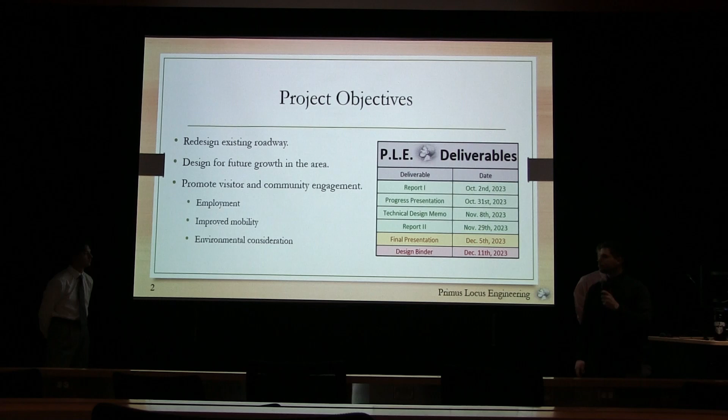So for choosing the final alternative, each engineer will design or construct a weighted rubric. This rubric will have specific criteria relative to their discipline, and these criteria will then have weights based on their importance. Using this rubric, the engineers will rate all of their alternatives, showing the comparisons within them. Once they are rated, the engineers will be able to pick the optimal alternative for the final design.

After all the alternatives are chosen, we were able to construct a design and construction cost estimate. This will be talked about later in the presentation.

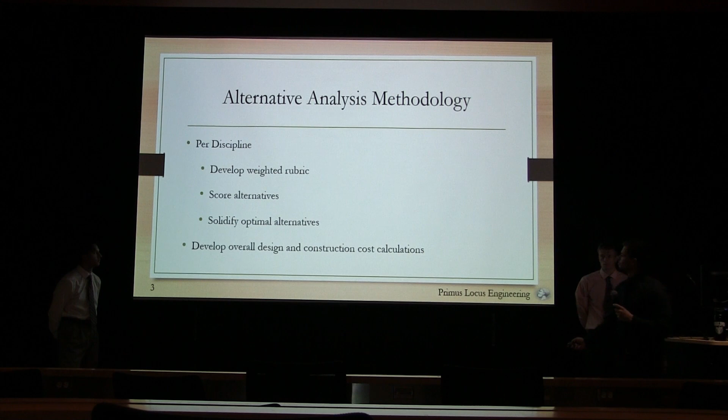As well as being the project manager, I am the water resources engineer. Recapping some of the things from the previous presentation, my main goal of the project is to treat the water quality volume from the impervious areas to improve water quality while also reducing the phosphorus load by at least 65%. I will also be designing systems to store the flood control volume within the project.

All of these designs will be done in accordance with local, state, and federal regulations. In the previous presentation, I also ran through the steps and calculations to calculate the water quality and flood control volume. For the sake of time, I will not recap those, but they are attached in the technical memo.

I also presented 3 alternatives in the previous presentation. I did add a 4th for the analysis and picking the final alternative.

Recapping the major components, alternative 1 had the bioswales on the north and south end of the road. The visitor center had the storm sewer system leading to the infiltration basin. On the east side, it was the curb and gutter system, and alternative 1 had the hydrodynamic separator leading to rain gardens.

Alternative 2 was the same bioswales on the north and south end of the road. However, this time at the visitor center, instead of the storm sewer system, it was the rain garden leading to a detention basin. On the east end of the road, it was catch basins again and a curb and gutter system, but without the hydrodynamic separator—it was now rain gardens leading to underground infiltration storage.

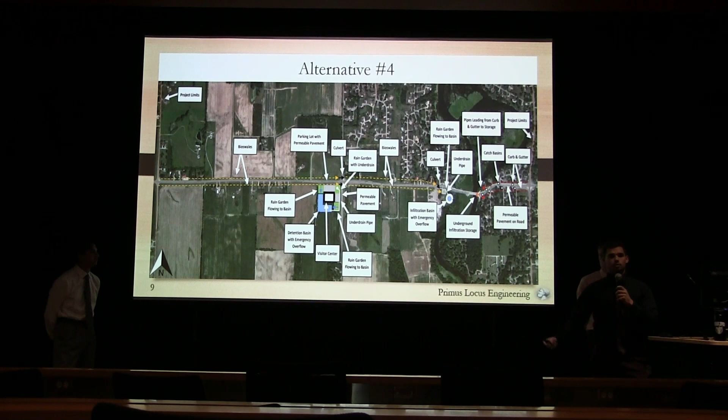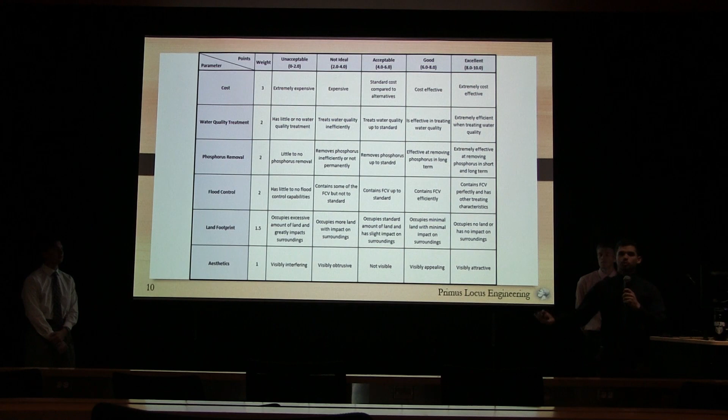Last was aesthetics with a weight of 1. This wasn't incredibly important to me because most of my systems can't change too much with the aesthetics. However, for systems being put in around the visitor center, I wanted to make sure it was visually appealing since it will be a brand new center.

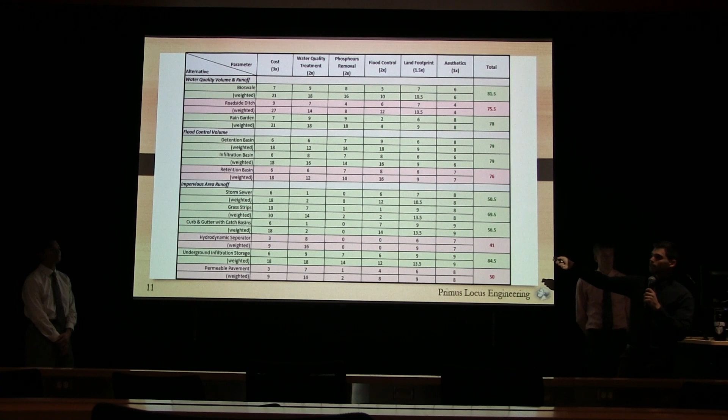So a sample plot to help understand this table, starting with bioswale at the top: I would rank each criteria on a scale of 1 to 10, and then based on the multiplication of the weight, I rated this a 7, which then went to 21. Adding the columns of each criteria, we would get a total. For the bioswales, it was a total of 81.5 versus, let's say, the roadside ditch was 75.5. Therefore, I went with the bioswales.

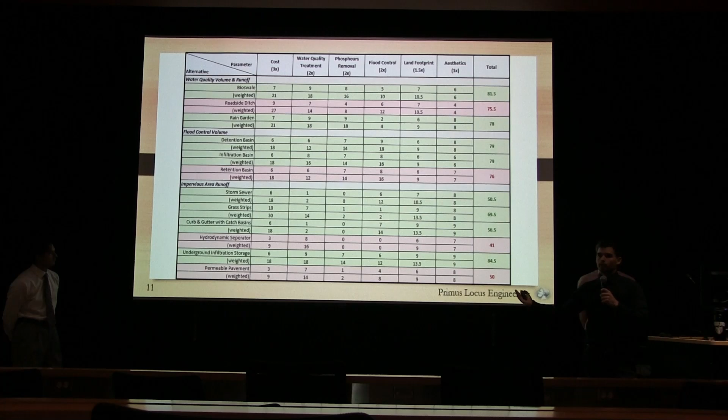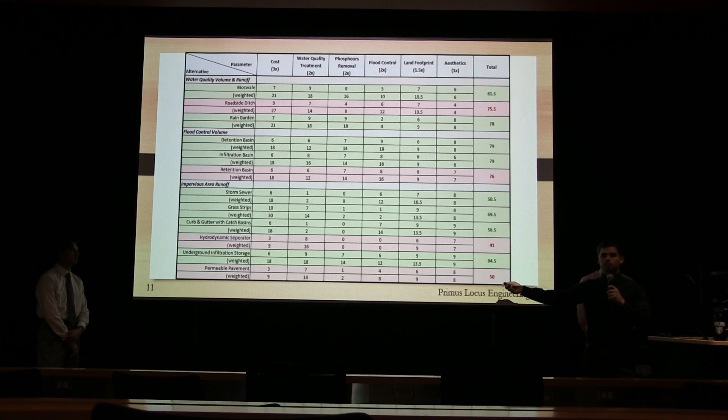And then I separated each system within its own jurisdiction. The water quality volume systems were separated, and the flood control volume systems were separated. And here are the impervious area systems, where the systems are used either at the visitor center or on the east side of the bridge.

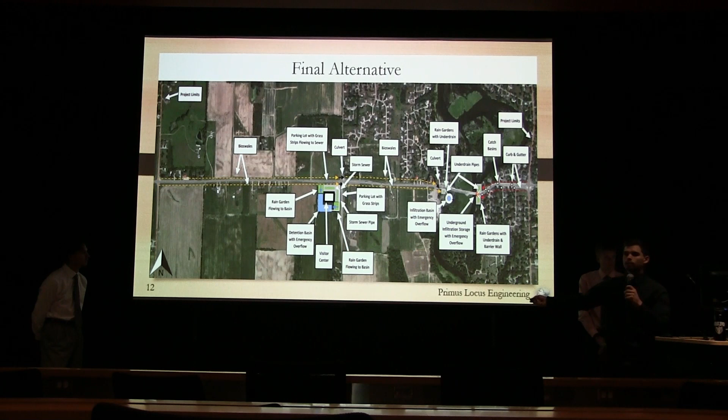At the visitor center, I did go with the storm sewer system. There will be grass strips in the parking lot to allow pre-treatment for the water collecting there, going to the detention basin. I also followed alternative 2 and put the rain gardens on both ends of the parking lot to allow extra treatment for water running off into the basin.

On the east side of the road, I went with the curb and gutter system leading to the rain gardens. These rain gardens will be supported through barrier walls to ensure they remain structurally intact in the case of strong flow, and then these will filter down into an underground infiltration storage.

So with my final alternative, in the future I plan to minimize costs within each system while also improving the efficiency, coordinating with each member of the team to do so.

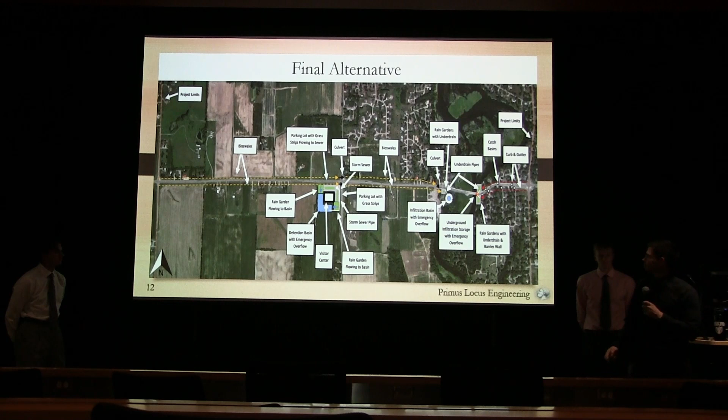So the project objectives for the environmental engineering component of the County Road 38 reconstruction include designing complete clean water treatment that requires meeting the most stringent EPA drinking water standards by using the latest treatment technologies. Additionally, the project demand was forecasted for the next 25 years, which requires 1 million gallons per day of clean water to be supplied.

The location of the surface water and groundwater was coordinated with the other team members, and the existing water network was eliminated due to concerns in its ability to supply the 1 million gallons per day.

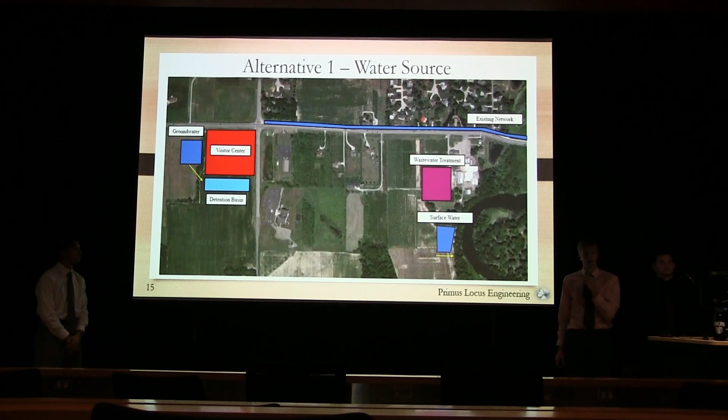The second alternative revolved around the treatment components. The first type would be the flocculation basin. There can be a vertical turbine mixer, a paddle flocculator, or a baffled channel. The vertical turbine mixer is a confined unit, while the paddle flocculator is slightly bigger with better water quality. The baffle channel was eliminated due to it being a more old technology that does not meet the criteria of recent technology.

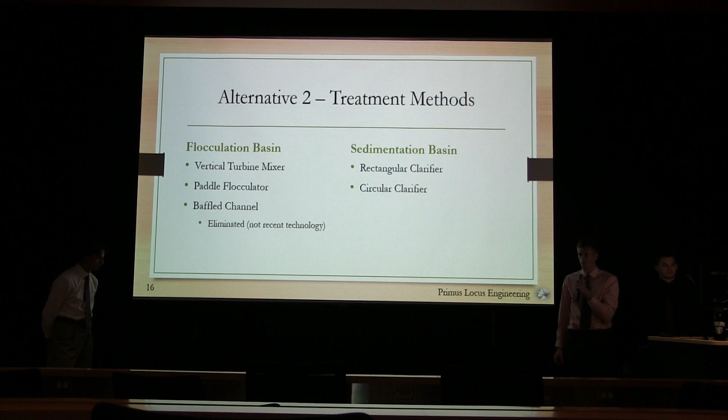And the type of sedimentation basins considered were a rectangular clarifier and a circular clarifier, once again having differences in size and water quality. The third alternative was the water distribution.

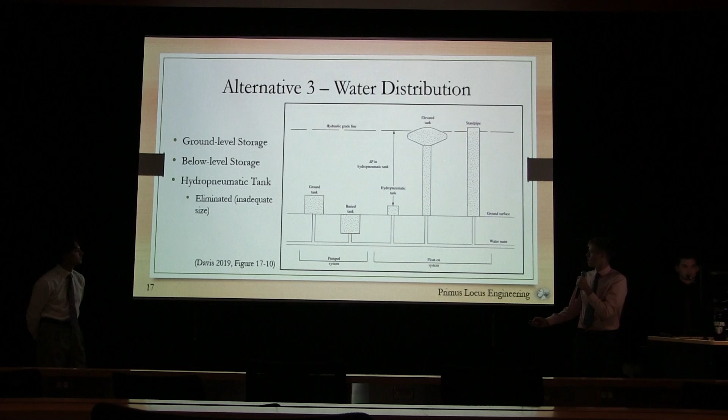The alternative criteria were evaluated using the parameters of water quality, cost, operation and maintenance, land footprint, and aesthetics. Water quality and cost were of the utmost importance, thus being factored with a multiplier of 3, because water quality is imperative to the health and safety of the citizens of Goshen, while cost is also extremely important in providing a cost-effective design for the city.

Operation and maintenance was also weighted with a factor of 2, because the standard level of labor is a characteristic that will last the life of the water treatment plant. Land footprint measured the amount of land consumed by each alternative, and aesthetics measured the visible obstruction from each alternative.

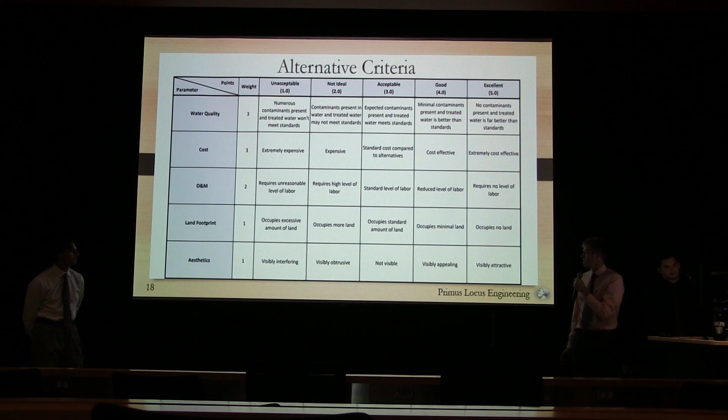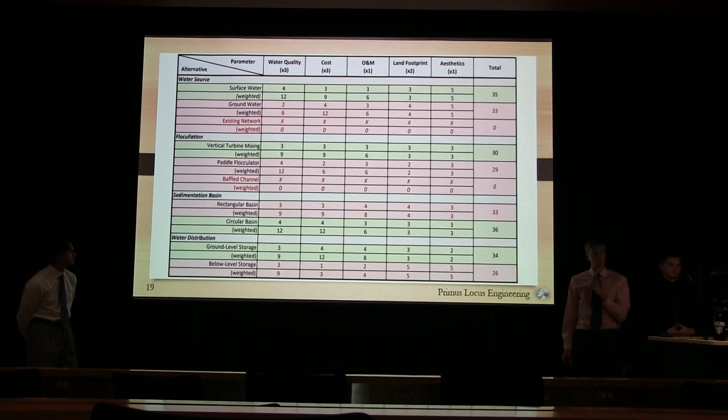Using the same alternative scoring system that Sam described, surface water was selected due to its superior water quality. Vertical turbine mixing was selected due to its reduced cost and confined space. The sedimentation basin selected was a circular clarifier due to its superior water quality attributes. Finally, ground level storage was selected due to its far reduced cost compared to below-level storage.

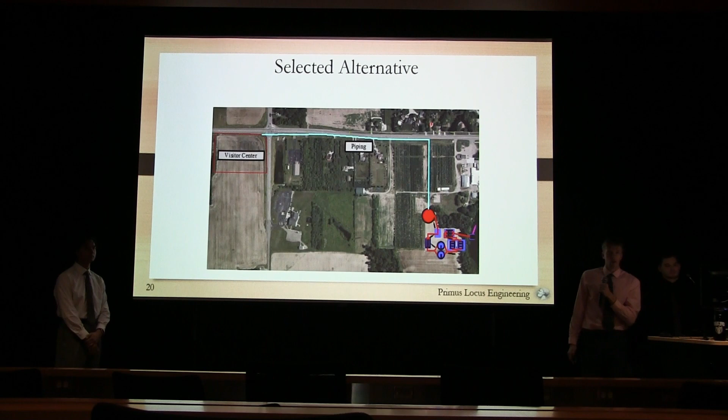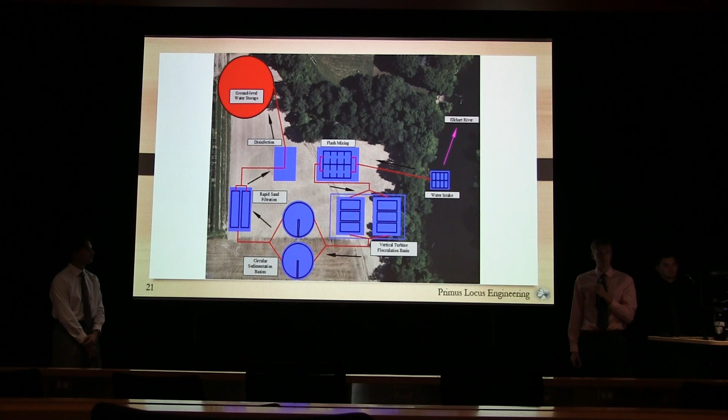Thank you, Sim. My name is Mateo Duran, and I'm the lead of the structural department for PLE, and I'll be talking to you about the visitor center that PLE was tasked with designing for the County Road 38 corridor project. To go over the objectives as we did in the last presentation...

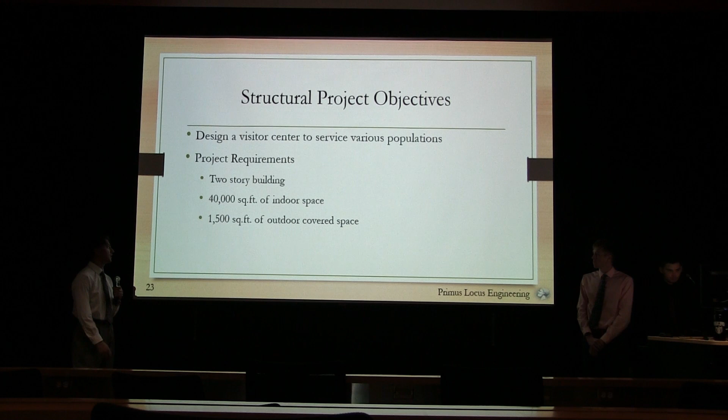PLE was tasked with designing a visitor center to service various populations, such as motorists or drivers going through County Road 38 and Goshen, and even the general population of Goshen or around the visitor center looking for somewhere to visit. The project requirements were a 2-story building with 40,000 square feet of indoor space and 1,500 square feet of covered outdoor space.

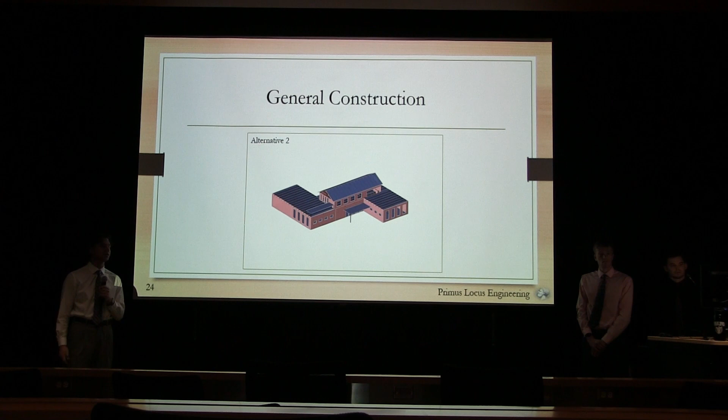With that, we created this, the general construction for all of the alternatives we'll be showing later on. Shown right now is alternative 2, where we have masonry walls, steel beams, and timber roof joists for the upstairs level. All of our buildings will follow this layout, just having different materials for each alternative. So this is the general layout.

We have 41,800 square feet altogether, with 32,000 square feet on the first floor, where you walk into a lobby, then have a gift shop, a museum, and also an area for Elkhart County to have their maintenance run out of.

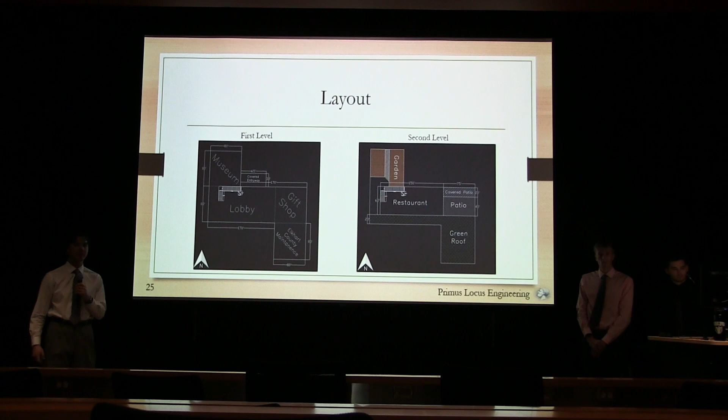On the second floor, we have another 9,000 square feet of covered space for a restaurant, which leads out to a patio, where we also have a green roof and a garden and more covered space. All in all, we will have 3,450 square feet of covered outdoor space.

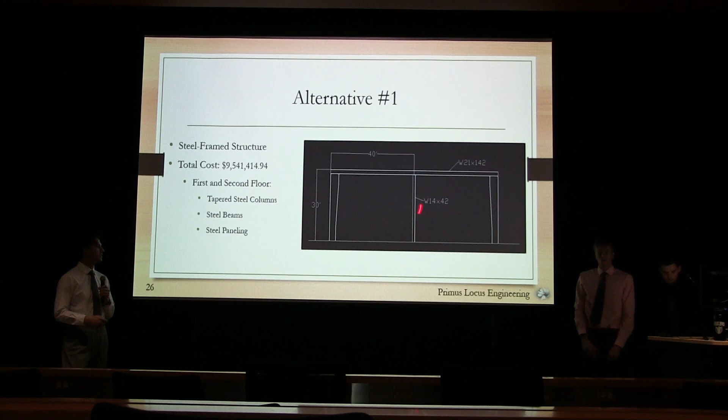Alternative one included a fully steel frame structure, and this alternative came out to be around $9.5 million. This would be steel framed on both the first and second floor with tapered steel columns on both sides, steel beams going across the top supported by interior columns, and steel paneling insulated to allow for energy savings when it came to heating and cooling during the winter and summer, respectively.

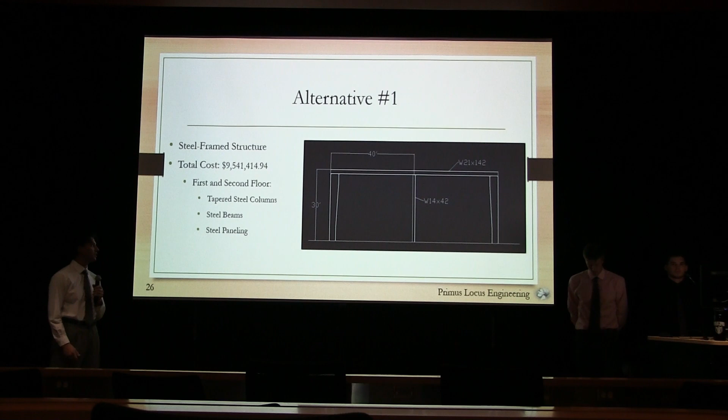Alternative two, shown in the first photo, would include masonry walls all the way around with steel beams and steel columns in the middle, as well as a timber roof joist for the second floor restaurant. This came at a total cost of about $9.4 million. On the first floor, we would have those masonry walls, steel beams going across with the unbraced length carried by interior steel columns.

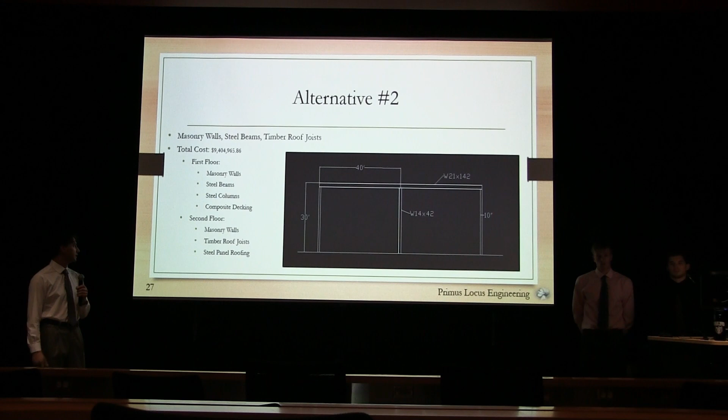And then we would have composite decking running along those beams in order to create a nice base for our second floor, which will then be carried by masonry walls and also have timber roof joists upstairs in the restaurant for that aesthetics for people that are dining there. And those would be covered by steel panel roofing, which again would be insulated to help with energy savings.

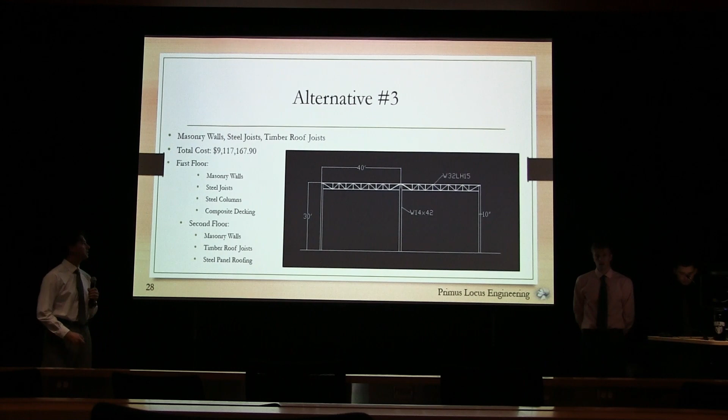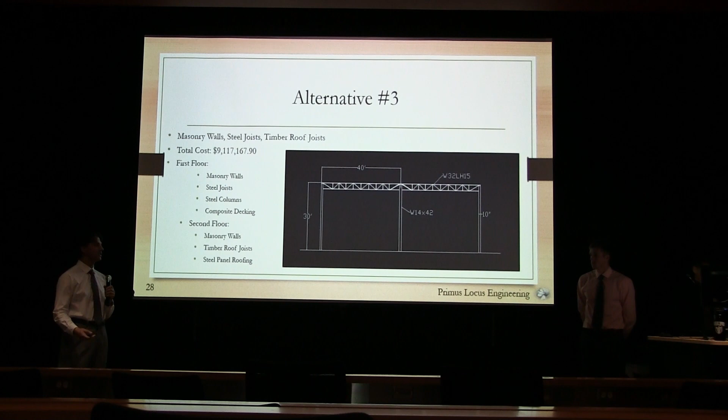Alternative three is very similar to alternative two, with the difference of having steel joists instead of steel beams running along the top of the first floor. This came at a total cost of $9.1 million. Once again, masonry walls all around, steel columns to support unbraced lengths, steel joists instead of the steel beams and composite decking on top. And the second floor would have the same masonry walls with the timber roof joist for aesthetic and steel panel roofing.

With these alternatives, I created a ranking criteria with cost and factor of safety being the top parameters needed to be met. As engineers, we are supposed to ensure the safety of the public, as well as make sure we have a cost-efficient design at hand. I also had environmental impacts, workability, and aesthetics, with environmental impact and workability being a factor of 2 and aesthetics a factor of 1. I ranked these from 0 to 10, with 0 being unacceptable, to 10 being the most excellent.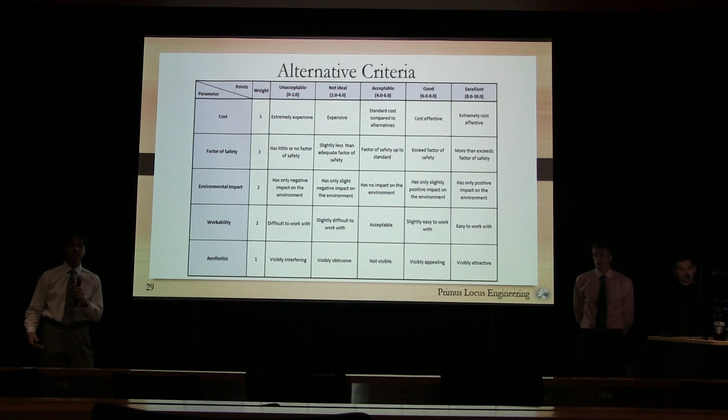With this, you can see how I was able to come to a conclusion on what materials to choose. For the floor, we ranked the steel beams with the steel joist, with steel joist winning out just barely when it came to workability as well as aesthetics. For the restaurant roof, we had the option of timber trusses or steel trusses, and once again timber trusses come out ahead, especially when it came to workability and aesthetics, especially if you're there eating - sometimes you like to have something nice to look at.

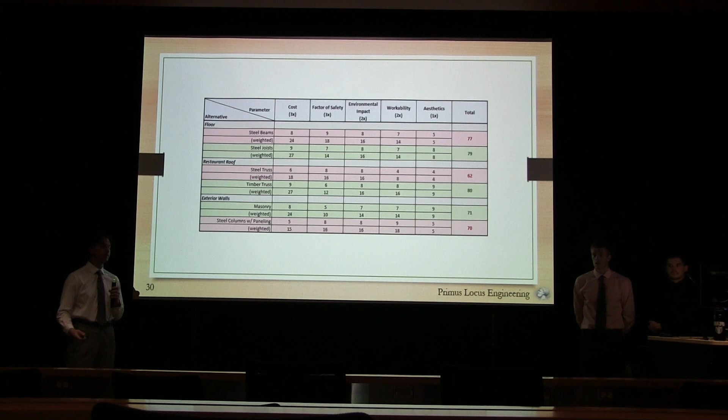And for the exterior walls, we had masonry and the steel columns with the paneling all around, where the masonry came out especially for the aesthetics and for the cost, because the masonry is more readily available around here than the steel columns would be.

With that, I selected alternative 3, which was the masonry walls with the steel joist and the timber roof truss for the second floor restaurant. First and foremost, this provided an easier construction. The masonry walls don't have to come all in perfect pieces like the steel columns would have to, as well as the steel joists. They can be broken apart and fixed if there are any issues with them, and the erection is a little bit easier when it came to the steel joist.

It is cost effective as well, with the masonry being a little bit cheaper than the steel columns, steel joist being a little bit cheaper than the steel beams, and the timber roof being cheaper than the steel roof. And it would be aesthetically pleasing, which would allow for an inviting place for people to want to go into, rather than somewhere that might be a little bit uglier and might deter people from coming and visiting.

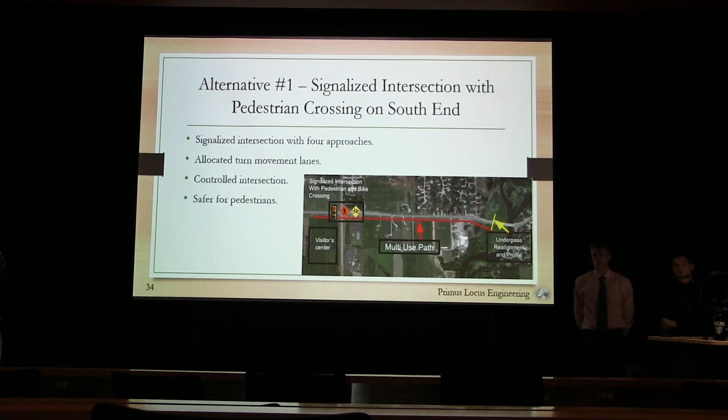The first alternative I have is a signalized intersection with crossing on the south end of the site. This is a signalized intersection with 4 approaches, with allocated turn movement lanes. This is the most controlled intersection and is also safer for pedestrians and bikers, which is an important aspect of this project. This is the alignment on the west side of the project, and as you can see, we have the 2 lanes for the left turn and through, and also the entering and exiting out the visitor center.

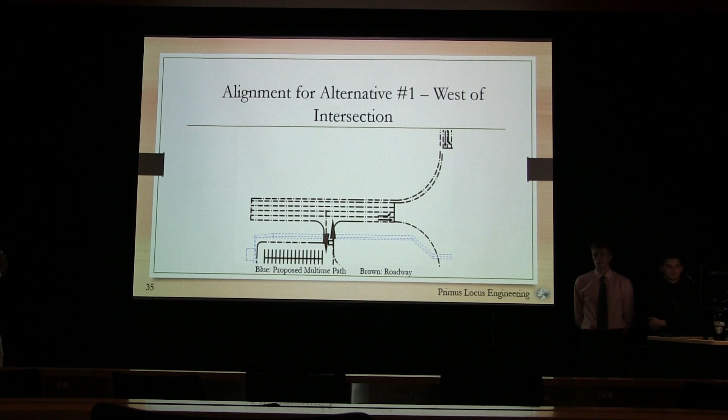And this is the alternative at the underpass for the County Road 38, because there's already currently existing pedestrian means of transport on the north end of the bridge. This is basically just showing that we're going to connect the new multi-use path with the underpass currently existing at the bridge, or with the pedestrian modes of transport existing on the other side near the bridge.

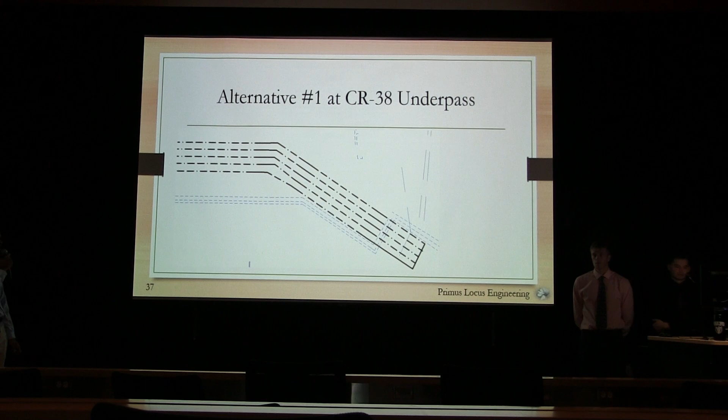This is the second alternative, a roundabout intersection with crossing on the south end. It's quite similar to the other alternative, but it is a roundabout with 4 different approaches: north and south on County Road 21, and east and west on County Road 38. This would have the path on the south side, as mentioned before.

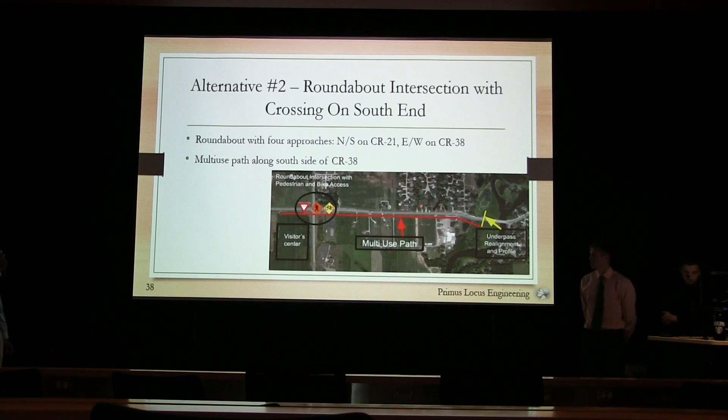And this is the alignment. As you can see, it's pretty much the same as the previous one, except we have the center circle in the middle. We have a through lane, a left turn lane, and a right turn lane. This is also pretty much the same as the other alternative with the underpass.

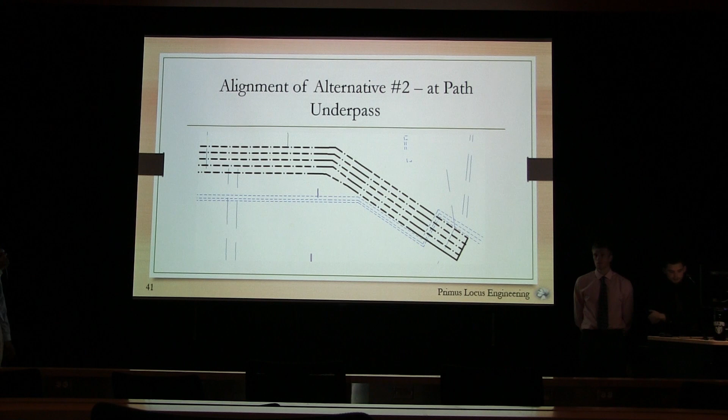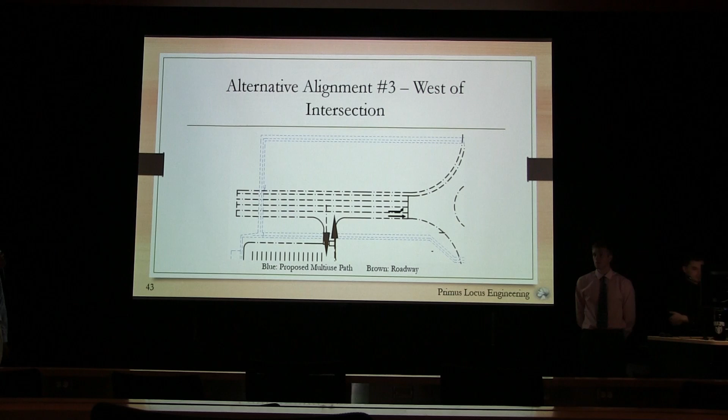And we have that continuing on, basically all the way to the subdivision, which is about right over here. We dropped it down a bit because it makes more sense to connect it with the existing path currently on that side of the roadway.

And this is showing it connecting with the proposed path on the south side with the path on the north side.

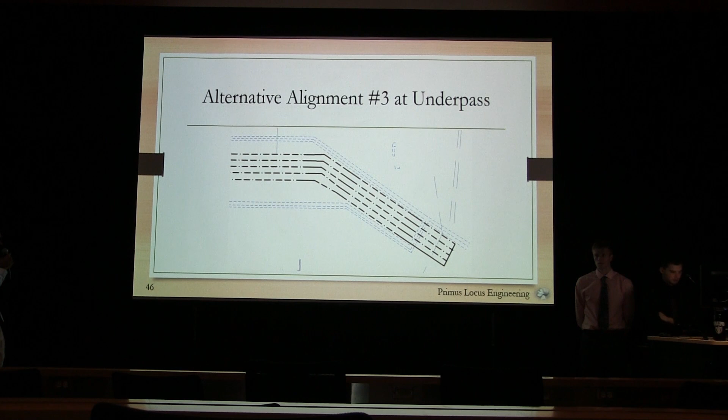Medium priority was construction difficulty, time to complete, and aesthetics. Pedestrian and biker access had the highest priority, I believe, out of all of these.

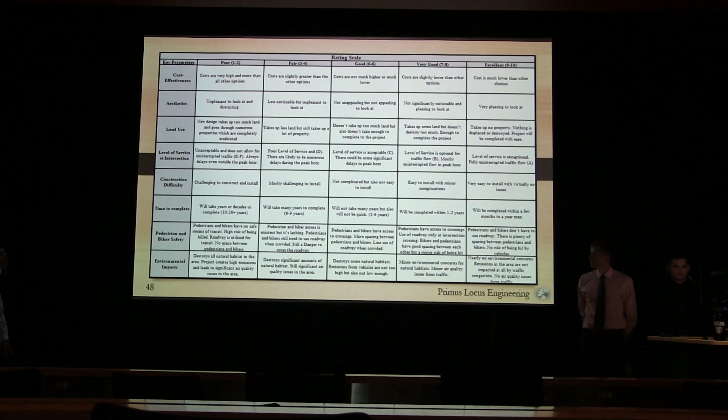This is how I got the total ranking. I did the weight times the rating given to the alternative, which was shown at the very top. I'll use pedestrian and biker safety as an example.

We used a ranking of 9 for pedestrian and biker safety, and its weight, as shown here, was 10. 10 times 9 is 90, giving us a total of 90 for pedestrian and biker safety. I did the same thing for each of the other columns, and whichever had the highest total ranking was selected for the alternative.

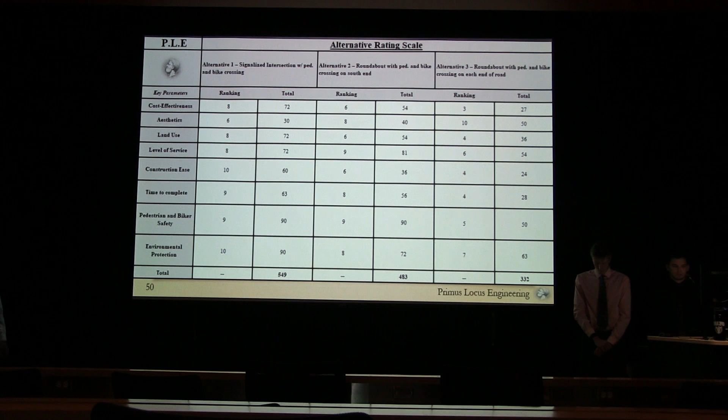At the end of the day, the signalized intersection with crossing on the south end of the intersection is the one that wins out. It meets categories like pedestrian and biker safety, cost effectiveness, land use, and aesthetics.

And now I'm going to hand it over to Sam to do the cost calculations.

Thanks, Vance. As stated earlier, once we got the final alternatives selected, we calculated the design and construction costs for each alternative and the project as a whole. Our PLE completed a work breakdown structure highlighting the hours for each engineer to work on the design, attached in report 2. Taking the hours and billing rate and adding them all up, it was about $88,000 total for the design work.

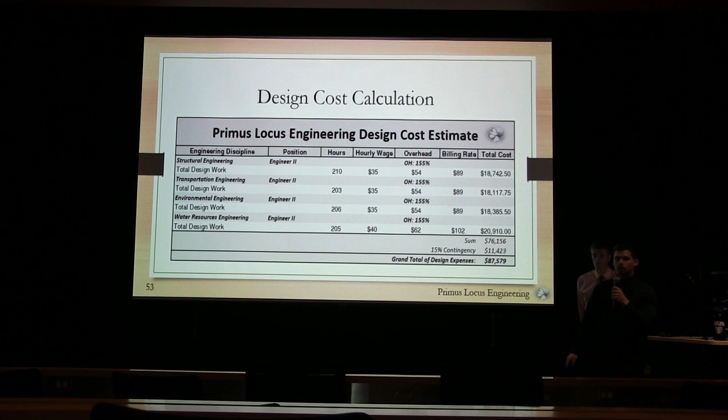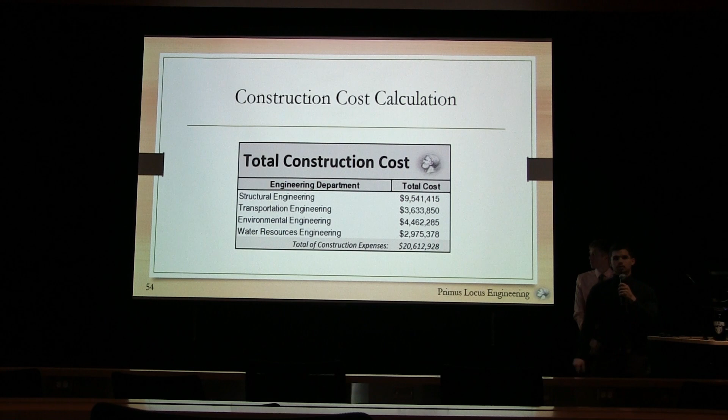Moving to construction costs, knowing the final alternatives selected, we also knew the components within them. Using sources such as RS Means and others referenced in report 2, we completed construction calculations for each engineer, adding them up to a total of $20.6 million. Thank you very much, any questions?

Question? Oh, sorry.

Yes, I have a couple questions, I guess. Going back to the environmental side first, in the matrix you're evaluating water quality and cost. Would you say there's a close connection between those? Because any system you design has to meet standards like the EPA standards?

Absolutely. Going to the criteria matrix, there is a correlation because it costs more to do extensive water treatment. When designing relative to surface water or groundwater, each part was designed to meet the EPA standards, and both would meet the most stringent EPA drinking water standards. There were concerns with groundwater in particular having heavy metals such as arsenic. It wasn't enough to mount concern over contaminants found after the water was treated, but there's still an elevated risk because of that. So that was taken into account for water quality. But generally speaking, for the rest of the alternatives, there is a trade-off between water quality and cost.

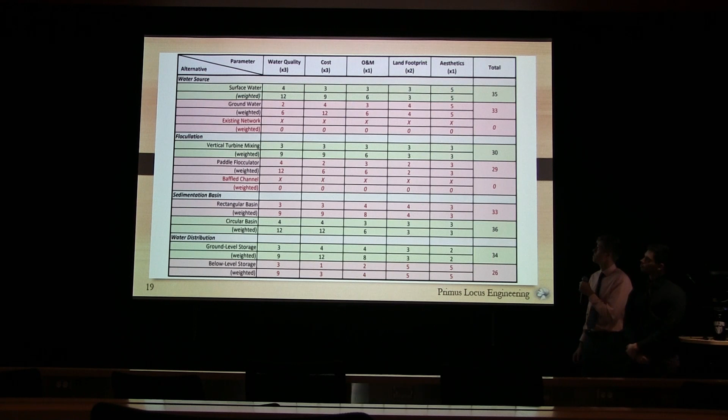So a lot of the tiebreakers, if you will, came through the other criteria, such as operation and maintenance and the amount of land consumed.

Yeah, is there, I would say, with water quality, is part of that difference in rating because maybe the standards for certain heavy metals aren't ideal? They still put the public at risk if they're exposed to those.

Absolutely, yeah. That was taken into account - the water source and the treated water, and contaminants found anywhere in the treatment. So a better description would be not just the treated water, but the water process in general, because if heavy metals are found anywhere in the treatment process, that poses an elevated risk for residents and the workers operating it.

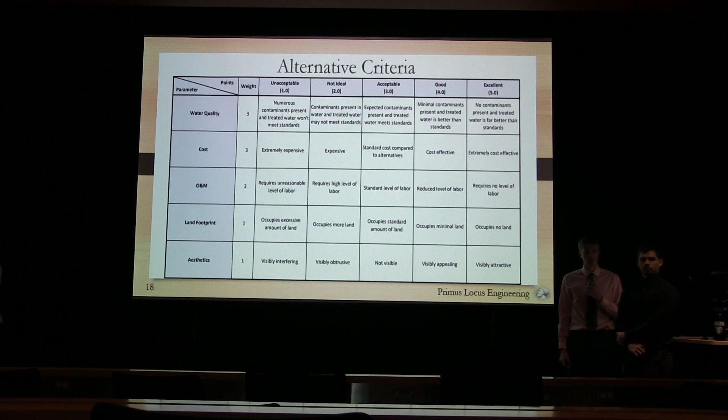All right, thank you. That's good. And then I guess the only other question was on the water side.

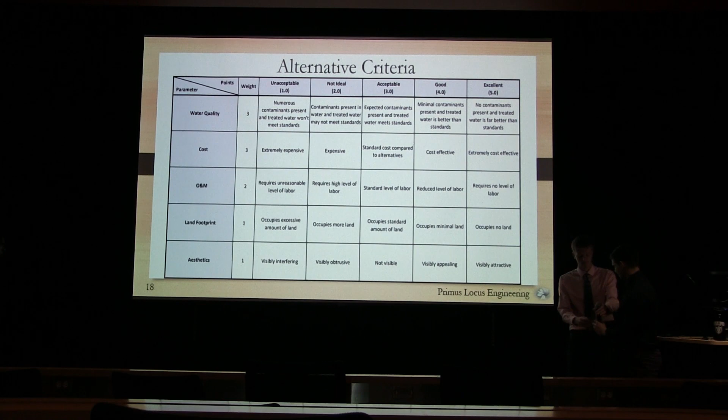Sam, so you ruled out permeable pavement. Can you go back over that just a little bit?

For that, yeah. Looking at all the other options versus permeable pavement in that impervious section that I listed as the visitor center and the east side of the bridge, permeable pavement was the most expensive for those options, along with the hydrodynamic separator. But permeable pavement had a lot of constraints, like how to construct it and coordination with other engineers. So for that most important column of cost and everything, it was easiest to go another route since I knew the other routes were efficient in treating that water.

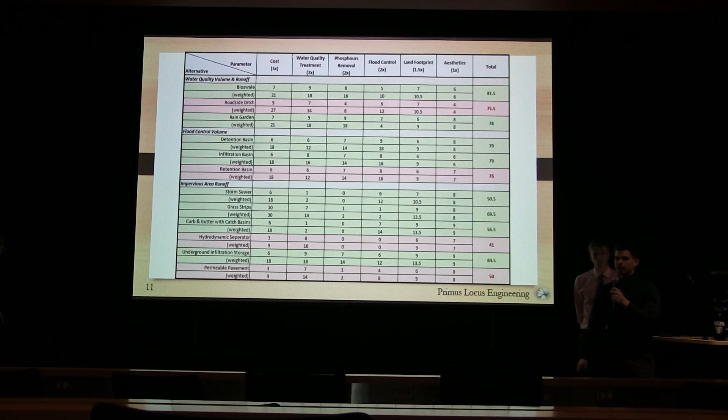Looking at the other treatments, however, permeable pavement was good for water quality treatment but didn't do much for phosphorus removal. However, in that impervious area, that wasn't super important since many other parts of the project will handle that. The land footprint was good for the most part.

However, looking more into permeable pavement, in my own judgment it changed the look too much and the footprint from the original, because you're not just going to lay asphalt down - it's going to be a different construct there. The aesthetics was nice, though. I did see some nice designs in permeable pavement that I liked, but since that was my least important consideration, I did not end up choosing that one.

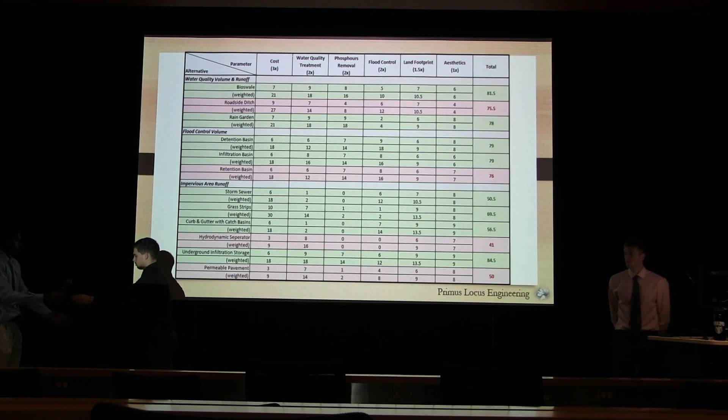All right, thank you. Vance, have you taken into account the distance from the entrance to the new building to the intersection? Is there enough room there to make that work?

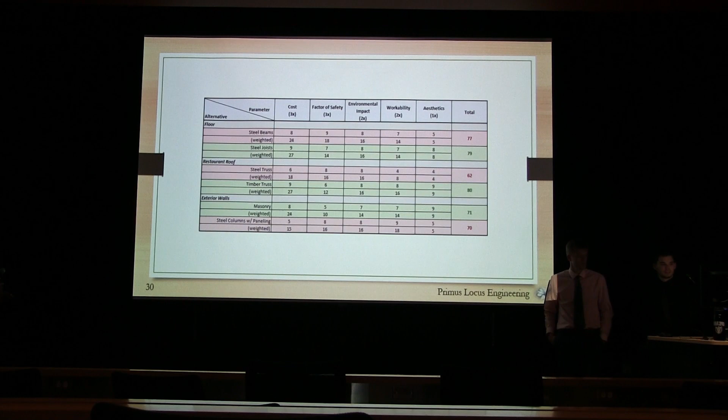Are we going to the transpo? Yeah, actually, yeah, there we go. So you were saying...

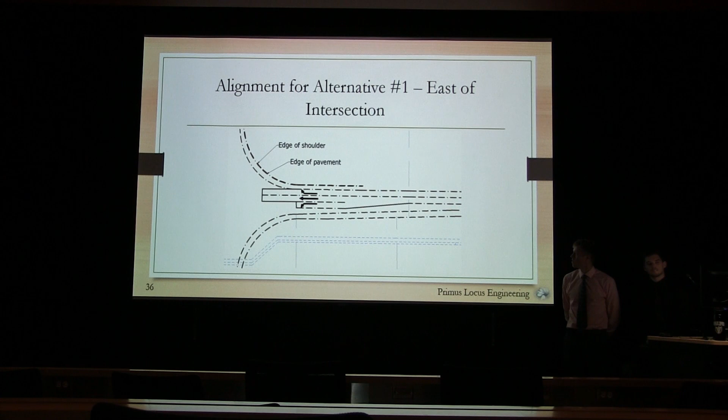I'm not sure which - the distance from the intersection to the entrance to the parking lot. Have you looked into whether that's far enough to make this actually work?

I think so, based on basically what I designed in CAD. I believe it was - because in this picture, I guess it could be kind of low. That might have to be looked at a little bit more, but based on what we have right now, I think it looks close enough to where it's not going to cause a bunch of wrecks or anything.

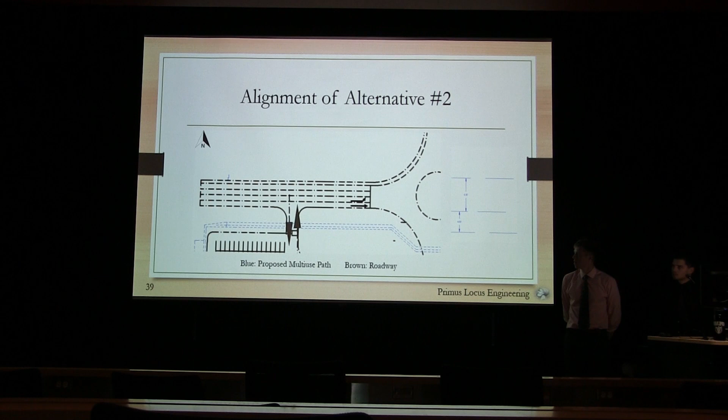Maybe go to the one where you're actually using the signalized intersection, so we ought to look at that diagram rather than the circle. Should I just pull the whole thing up? There we go. Yeah, so you might consider moving that entrance to the parking lot to the west and enter on the side rather than in the middle, unless - again there's no scale here.

I don't know what the distance is from the entrance to the intersection. If someone wants to leave and turns right but says, nope, I want to turn left, he's got to go across two lanes of traffic. And is there a backup there? That kind of thing.

Right, I think maybe we need to look at that a little bit. Okay. Any other questions? All right, thank you, everybody.